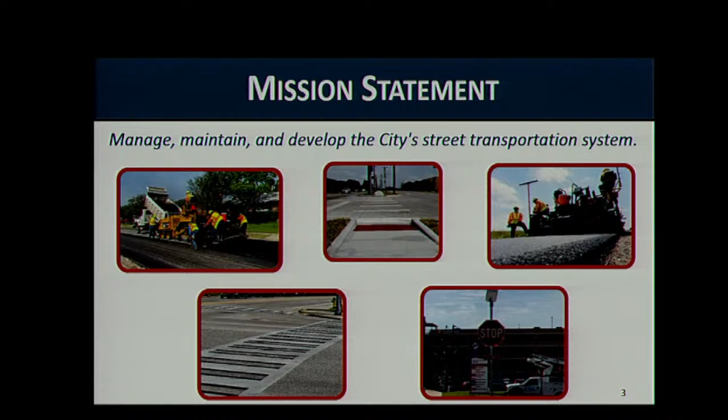So what's our mission statement in streets and traffic? We'll start with them first. It's to manage, maintain, and develop the city's street transportation system. There's a lot of different things that involve that - sidewalks, streets, street maintenance, pavement markings, just the gamut of what we do in traffic and in streets.

So what do we encompass? We have over 1,200 centerline miles of streets and roadways - that's like driving to Chicago, the amount of streets in our city. And that's quite a few roadways. 252 signalized intersections and about 50,000 signs as well.

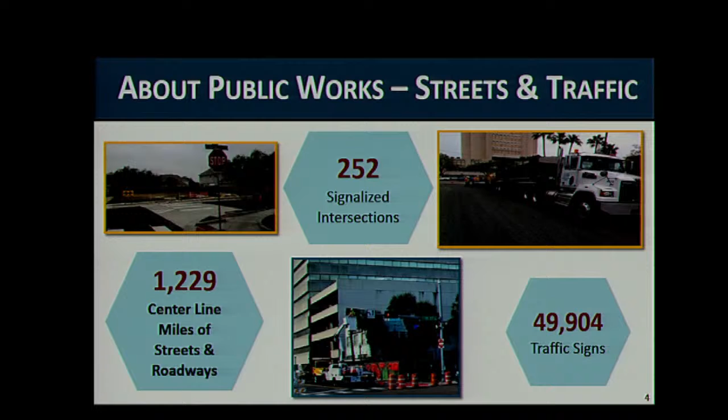And if you've been in Corpus most of your life, you'll know that every weekend we have signs that get knocked down, traffic signals that get knocked down. It's important that we continue to maintain those areas.

So let's talk about what our achievements have been in 2021. 19 months ago when I got here, the city manager gave me a lot of initiatives that we had to accomplish, and a couple of those you see here are those very ones that he gave me.

So achievement one, we established the first ever 5-year rolling infrastructure management program that's approved by you and can only be changed by you. This gives us more transparency to our citizens, and you can see that document online on a daily basis.

And when we approved budget this year, our 2026 year will go on as well. So again, transparency so our citizens will know what roads are going to be done. We fully implemented our design team, internal engineering design team, so now all of our projects for contractual services in street maintenance are designed in-house. Still a few in residential reconstructions, but we're going to start transitioning those as well.

The other major initiative was to implement in-house paving crews. And I am proud to say that Mr. Mata has been instrumental in implementing 2 fully staffed paving crews today that do in-house work. Those are the roads we would never get to, roads that don't need total reconstruction yet, but are past the point where they just need minimal maintenance. That's the area he's hitting today, doing a neighborhood approach. So, 2 major initiatives.

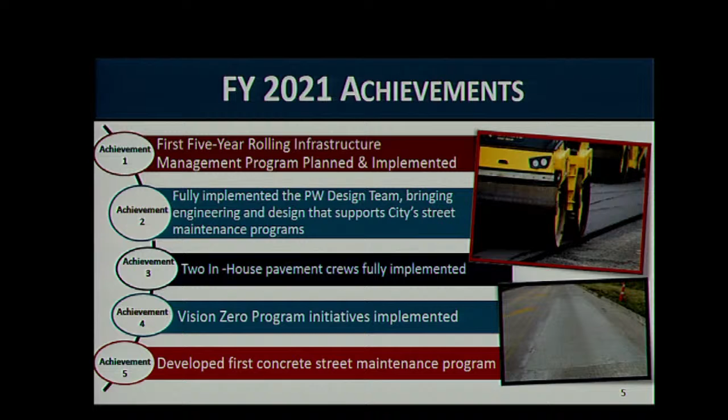And residential street reconstruction, which is one of our biggest needs here in Corpus Christi, because when you go outside your home, that's exactly what you see first, is a damaged roadway. It's the deferred maintenance over all the years that has led to the condition of our roads today. We've been spending $54.3 million, and that's an area where you'll see we're actually proposing to increase our budget.

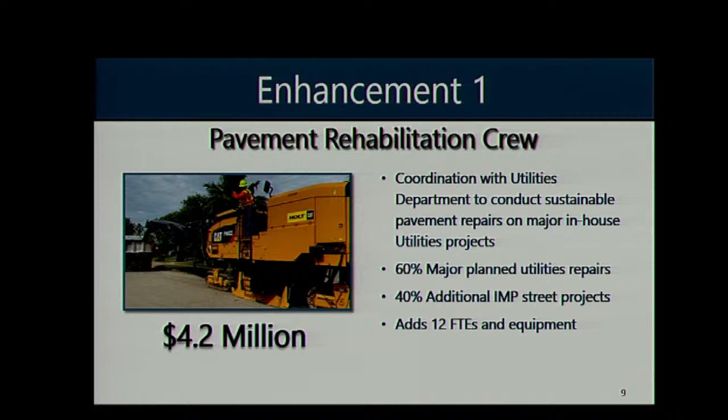This also brings in a reclaimer to be able to reclaim and stabilize those roadways. This is a major heavy crew that we'll be able to add, 3 crews that we'll be able to have in-house to do that work that currently we don't have on the program today.

Enhancement 2, Vision Zero program enhancements, is to continue that process. We had some success this year with flashing stop signs, for example. For us, that really made a difference in some areas, and we got a lot of feedback from our citizens about those. The speed trailers that we put out, you're able to calculate traffic and speed, so that you can put in traffic calming devices or signs. It's a very important process.

So this will build on that. Last year we started at $120,000. This year we'll add another $800,000 to that, so $920,000. Currently we have 4 speed trailers, and now we want to add an additional 4 to help us. And then stop signs, there will be multiple stop signs that we'll be able to buy. Last year we had a small amount that we were able to buy with that $120,000. This would significantly increase that.

One thing I didn't mention that I want to mention is street lighting. There's no funding right now if someone calls today and says, I want a new street light. We can put it in the process, but that funding has to come from somewhere. This is going to be able to put 100 street lights in, for areas that are dimly lit, which would help pedestrian safety and mobility through an area.

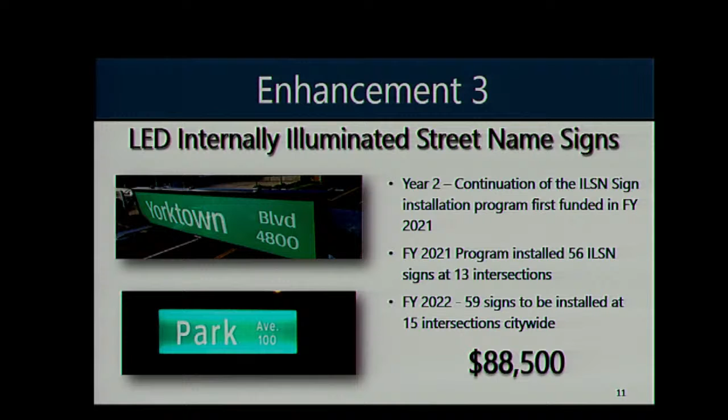This will allow us to put in 59 signs installed at 15 intersections citywide. These would be on arterials like Staples, Airline, the area of Lipes — all over the city. We want to make sure we're hitting all of our areas. This puts $88,000 toward that, continuing the process we started last year.

So Enhancement 4 is a very important program to me, and I think to a lot of you on council — it's the Safe Routes to School program. This is the start of this process. For us, pedestrian safety and mobility focused around our schools within a quarter mile is important.

These are the kind of things we can put in internally, in-house, if we had funding, along with our contractors. So when we looked at that, we evaluated all of our schools and took the top 3 with the biggest deficiencies — school zone issues, crosswalk issues, sidewalk issues, walkable paths, bike paths — and we recommend 3 school districts, 3 schools.

Tuloso Midway Primary was the highest priority in District 1. Fannin Elementary was next in District 2, and Yeager Elementary in District 3. Again, this is the start of this program. We need to start somewhere, and we want to continue that process.

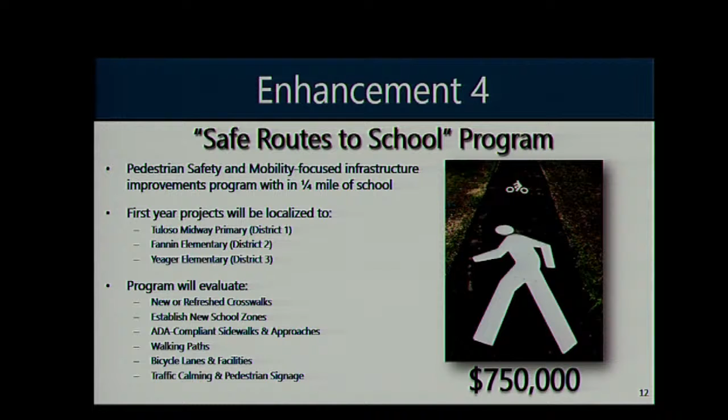When we are planning — not we, CCISD is planning a new school — why aren't these things being looked upon?

Well, yeah — and a great example would be Calallen. I don't know how old that school is now, but it's in a neighborhood with no sidewalks, and then it becomes our problem. We're sitting here going, how do we make the path, how do we get the kids to school? London's having this problem right now because there's a school in a cornfield, and now there are homes in the middle of cornfields. And now it's going to be our problem — not necessarily, I'm using that loosely — but what do we do about it?

So in the initial planning of these schools — and I realize many back then were different from what exists now — maybe there wasn't sufficient planning and vision to see what the future holds for the area.

But wouldn't this be something, part of this, that we should be looking at early on? Yeah, agreed, it is. And so we're doing a couple things to improve the codes here within the city.

The Unified Development Code, as we update that. Also, we're going to be bringing to the council a design standards manual for development so that we have the right quality of product that's put in. I know personally we were involved with the new Carroll High School, myself and Richard, and his traffic engineer.

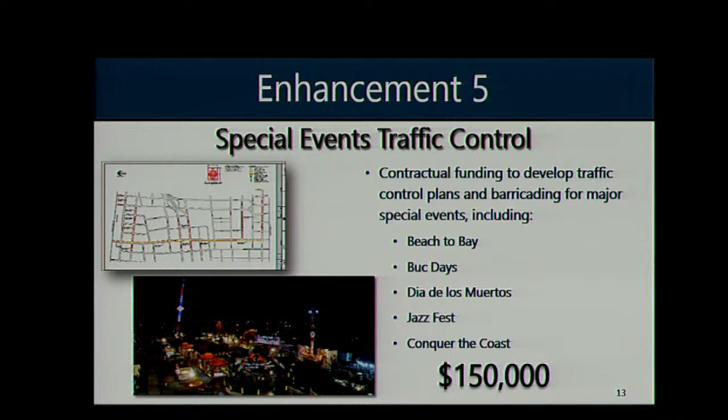Currently, when we're doing traffic control for these events, the cost comes out of our budget. So we wanted to identify that as we move forward and what that cost would be, and move it into a line item so we can see our expenditures on a yearly basis. So enhancement number 6 is a pavement evaluation contract.

This is important. We talked about this earlier, and how do we get to the next level, how do we forecast where we are. We've got a pavement management system that was started by the Corps of Engineers. It was called Micropaver, and they changed that to Paver. We are 8 iterations behind on that system, and it can no longer be upgraded. We need to get to the next level.

There are pavement management systems out there, out of the box, that can help us do that forecasting very easily. Today, we have to calculate it by hand. So one of the things we're working with IT on is to put this in place and be able to work with our pavement and our work order management system.

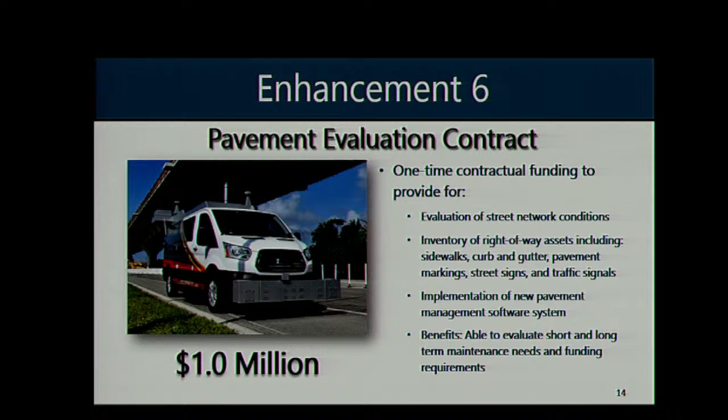This would evaluate all our streets again, so we have a contractor come and evaluate all our streets to get a new PCI network. That's important - this rain that we just had accelerated our degradation, and we need to know where we are currently today. So this will add $1 million to do that this year. That was one of the major initiatives the city manager gave me when I first got here.

Number 7 is a CDL pilot training program. This area is important because we want to make sure we can partner with places like Del Mar or other higher education areas so we can provide training for our employees to get CDLs. That's currently the biggest area we lack in bringing personnel into our service level areas. They don't have a CDL, and without one, they don't qualify for our positions. So internally, these are positions we want to promote and work on that process.

So there's a process in place: we bring in people, train them, and keep them moving up in our program. That's $14,000 - it's a pilot program. You'll see that on the stormwater side too as I move forward.

The next one would be a safety grant match. We apply to TxDOT every year for highway safety improvement programs, and we were able to get 3 projects in the next 3 years, and there has to be a match that goes along with that. So we're asking for $100,000 to do that. This will improve signals and signalized intersections for pedestrians and vehicles.

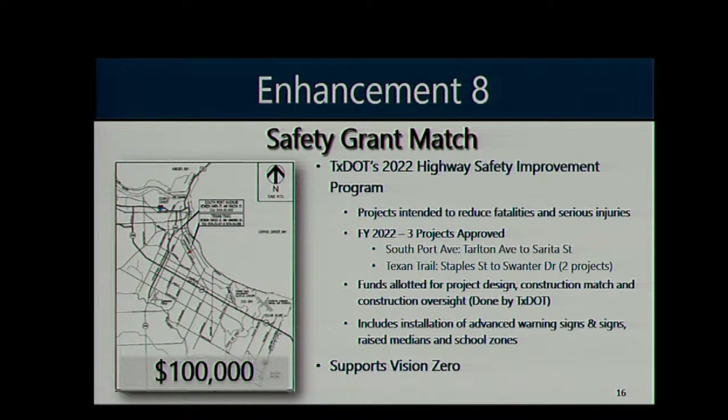Excuse me, Mr. - Yes, Mr. Martinez, Councilman Martinez. Yes, Mr. Martinez, on the CDL program, I just wanted to talk about things that we talked about with the police academy and the fire academy.

You know, I want to be able to avoid having people getting their CDLs and then going off and doing something else. So in that program, I just asked that we consider, like in the police academy and fire academy, some kind of commitment to the city once they get their CDL under this program. Yes, sir, there'll be a 2-year commitment for that, same as we have for engineers when we're attracting them in. They have a 2-year commitment, or they have to repay it prorated on the time they're here.

Enhancement number 9, traffic signal battery backup system installation program. We'll be able to add 63 battery backup systems at our intersections, providing 4 to 6 hours of signalized operation. For example, during the freeze event we lost power, and the intersections that didn't have a battery backup lost signals, while the ones that did lasted 6 hours, giving us time to put up a temporary stop sign, improving safety. We lose power based on AEP outages, vehicle accidents, and similar events. This would keep our system on battery backup when that happens, which is very important for our program.

That's $600,000. Enhancement 10, fiber optic communication to traffic management center.

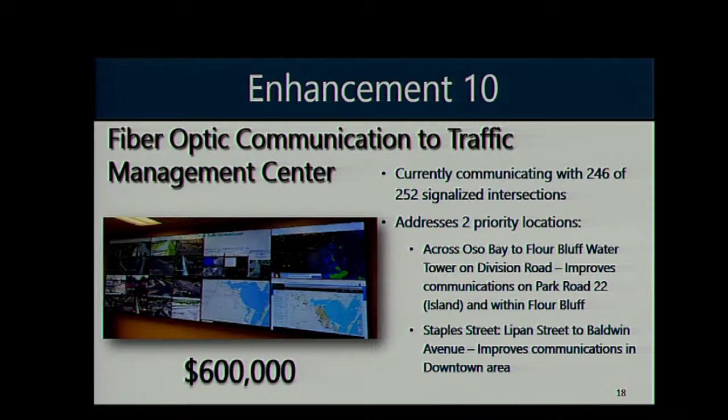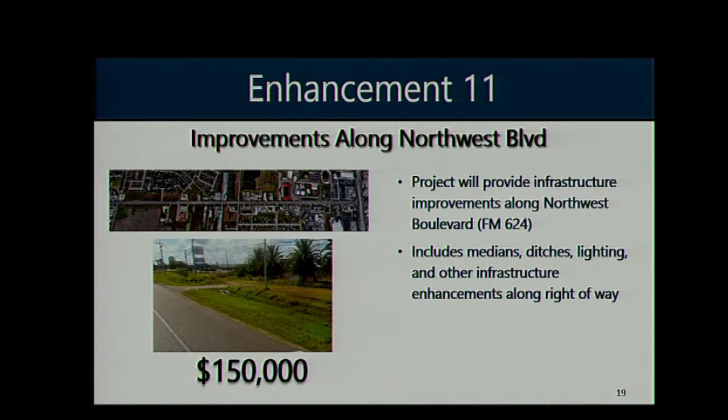Enhancement number 11, improvements along Northwest Boulevard. We're looking at how to improve medians, ditches, lighting, and other infrastructure enhancements along that right-of-way. That's a big area that's booming, and drainage is important there, so we've set aside $150,000 to start doing some work in that area.

We're going to move into stormwater. Again, you see the organization—in this area I'll concentrate basically on street operations and stormwater operations, that's in Roland's area for stormwater and in Gabriel's area for stormwater engineering. Our mission statement: protect life and property through proper stormwater conveyance while protecting water quality in our creeks, rivers, bays, and estuaries. Very important process.

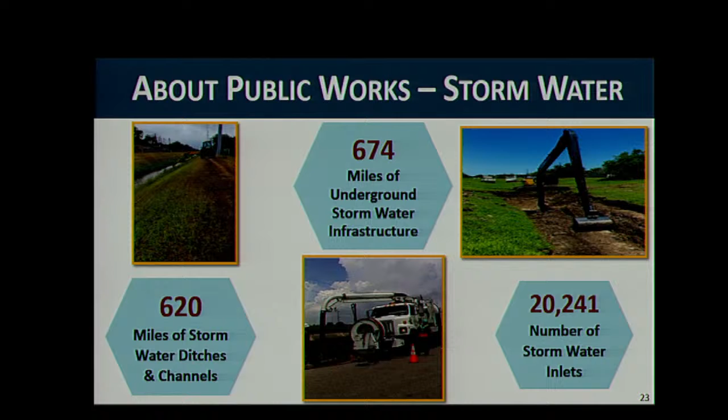We've got a good starting point, but this is an area we can definitely improve as we move forward. So about Public Works, what do we do? Last year, 19 months ago, it was consolidated—there were areas in the Water Utilities Department and areas in Parks, now they're in Public Works. We've got 620 miles of stormwater ditches and channels, and it's very important we maintain those properly so we can convey water through those areas without backups in the designed channels. We also have 674 miles of underground stormwater infrastructure that we need to inspect to see where we'll have issues or need improvements—you don't see them every day, you drive over the top of them. And then 20,000 inlets throughout the city that we have to keep clean, because those eventually get to our rivers and bays.

So what were our achievements? I'll go over a couple right now for the sake of time. One of the biggest things we did was develop a robust citywide street sweeping program, and we want to continue building on that. Currently it's a contract, and we've got 2 sweepers of our own that we've been using to augment that contract and do special events and that type of thing. So you'll see in one of the proposals we're looking at implementing more in-house street sweeping.

Richard, the street sweeping—we had none, right? None. And this gives us what exactly? This will give us another 2 sweepers. So we have 2 today, because we bought some last year.

Okay, and this will give us another 2. And now we'll be able to do arterials on our own, doubling the arterials from going from 4 times a year to 8 times a year.

I'll give you an example. Everhart was just built. We went out there, contractor cleaned it, said okay, here, you bought it. We bought it, so they sold it to us. We went forward, and within a week we had debris back out again. So that tells us that materials are coming off the properties when it rains. You've got to keep that clean and keep it from getting into the inlets.

Over the last 2 months we've been sending our sweepers out there on a daily basis, but you can go out again to Everhart and still see debris along the curb line that we're generating. So a lot of debris, many years of not sweeping, and that's exactly what's built up. We need to continue to sweep to start getting that off and keep it from getting into our inlets, because it'll eventually cause siltation in the channels, that's exactly where it's coming from.

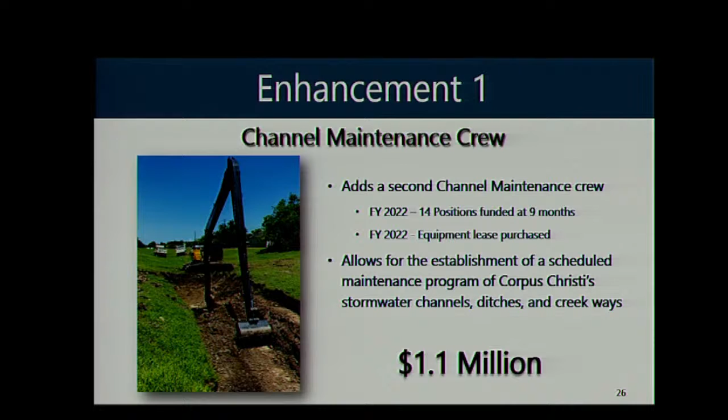We have a contractor here, Coastal Sweeping. They're trying to do their best to keep up, but they're seeing what we're seeing. When they're going through, they're filling their sweepers up immediately as they're running through the system, and they're having to continue to move back and forth and dump because there's a lot of material on our roadways.

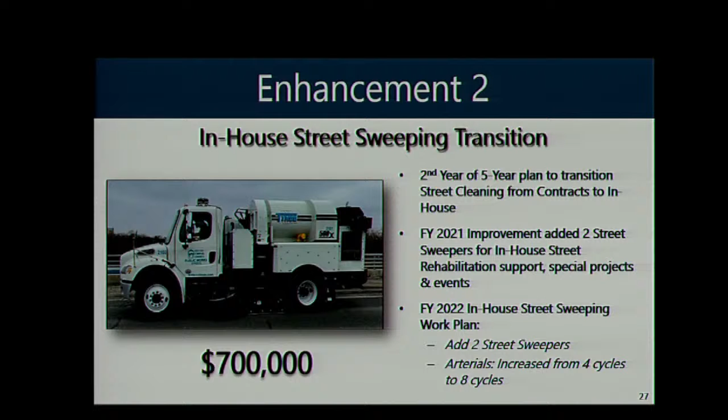Enhancement number 3, again, the CDO pilot program. We're just making sure that we're adding this in the stormwater side as well as we did for streets, $14,000.

Enhancement number 4 is public education and outreach. This is an important area, especially since we're proposing a standalone stormwater utility fee. We need public education to let our citizens know the reasons why we're doing this and what some of the important aspects are. This will allow us to get radio, cable time, billboards, and print education materials out for this. So, a very important part of the stormwater program.

Enhancement 5 is a stormwater account reconciliation team. We need staff members to assist with that. If we have a standalone utility fee, we need staff to help reconcile for customers and give them information on what they were paying before versus what they're paying today. There's also going to be a utility assistance program that this group would help with. This adds one full-time manager position and converts one vacancy we currently have that we'll be able to utilize in that area. The team ensures financial support and creates a sustainable program. This gives us an opportunity, as we propose this to you, and with any possible approval, we'd be able to implement it.

We have a question, Councilman Pusley.

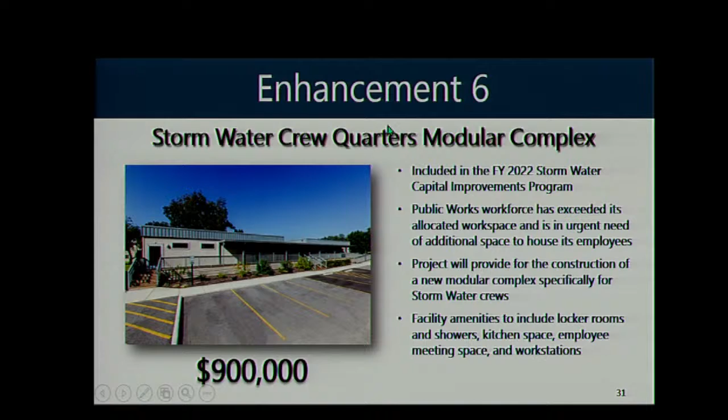So we're going to start talking about the proposed stormwater utility fee, a standalone stormwater utility fee. So why are we here?

There are a couple of options we have to do that. But to be able to do that, we need to have a fee, or a revenue source that we can rely on yearly and move forward with.

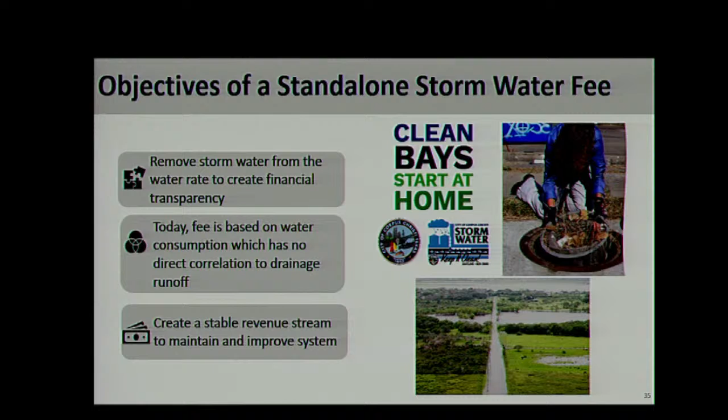This will also create a stable revenue stream to maintain and improve our system. This allows us to come back to you every year and say, here are the improvements we want to make, here's the fee structure, can we move this forward on a yearly basis?

So let's talk about the current fee structure. But with that, I want to talk about current customer impacts. So currently today, since we're funded through basically water usage, I want to tell you about water connections and types.

Out of the water connections, 91% of them are residential water connections in the city, and 9% are commercial. So the majority of the connections are residential and will impact residential currently today. But the estimated impervious cover, if you look at the center circle of the pie chart, 2/3 are non-residential.

So the more runoff is coming from non-residential, commercial, than from our residential customers. But how do we pay for it? On the right side, currently today, it's almost half, just a little less than half residentials are picking up the amount of funding we currently get, versus our non-residential or commercial. And then 3% from large volume users are also contributing.

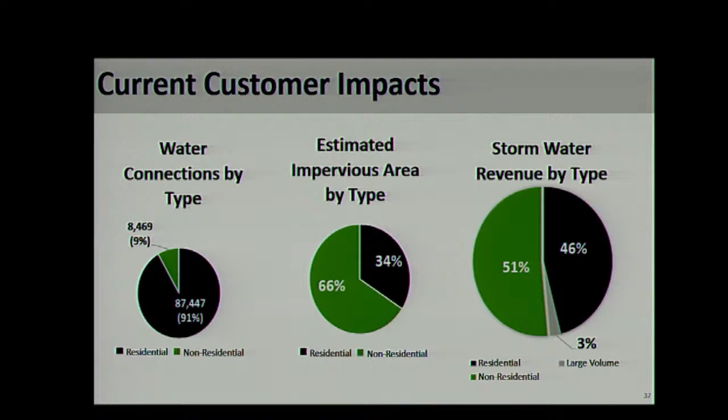I'm going to be the first one to tell you today, it's just me and my wife in the house we live in. And 8 months out of the year, I use less than 2,000 gallons a month, so I pay no stormwater. I pay nothing, I don't contribute into the stormwater fund. So out of residential customers, 18% pay zero towards the stormwater program currently today.

And 30% of non-residential customers pay zero towards the stormwater program. I know that's going to be impactful in those areas, but there are some things we're looking at to try to reduce that impact over this first year. But that's an area generating stormwater runoff, and that's an area we need to look at.

So the next one is parcels without water meters. This is an area we need to look at as well. There are some examples—parcels that might be a place where they store cars, vehicles, or have a shop. You see they have roof lines or created pavement structures that are actually having runoff, but they have no water meter today.

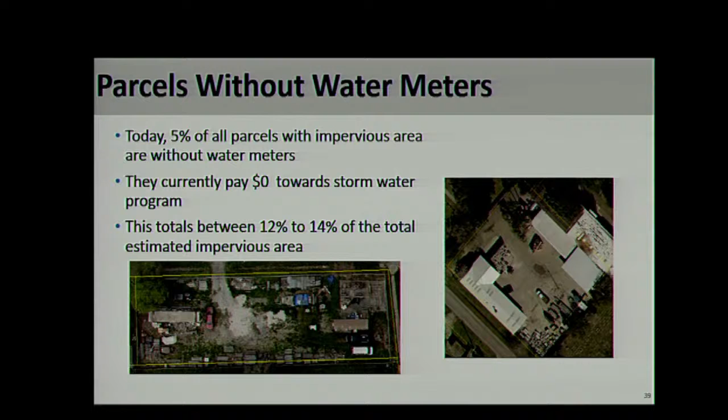So 5% of all the parcels in Corpus Christi with impervious cover are without water meters, so today they contribute zero towards stormwater at all. That totals between 12 and 14% of the total impervious cover in our city, which is a lot. And if you look at that, it could generate about $2 million in funding in that area, so we're looking at that as well.

So our proposed rate structure. How do we start here? How did we get to a point where we're able to calculate that?

So we looked at a residential unit. What is an equivalent residential unit? A house, a property. What is the median in Corpus Christi? We looked at industry standards to take a random sample, and so we took a random sample of 400 properties to come up with that calculation. That calculation is 3,280 square feet.

So that's what we're saying, a Tier 2 property would run—and I'll talk about tiers in a minute, Tier 1, 2, and 3—would have an average of about 3,280 square feet of impervious cover, which includes driveways, roof lines, sidewalks, those type of things that will not run into the yards. That number is important because it's the basis of what we're looking at when charging tiers and when charging for non-residential customers as well.

And we'll talk about the tiers in a second, but again, we put them in 3 different tiers: Tier 1, Tier 2, Tier 3. Tier 1 would be 0.75 of that. Tier 2 is that area, and Tier 3 would be something like a larger estate home or large properties.

So when we go to non-residential, it gets a little more complex. You have to look at what they're actually running off and how that is equivalent to a residential unit—we have to equate it back to something. So we look at an intensity of development factor. I'll give an example—one that came up over the last couple of weeks, and that was agriculture.

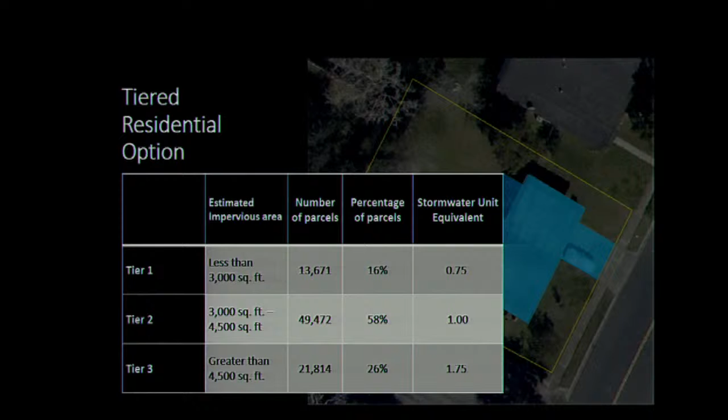Currently today, we're charging our customers based on their water usage. For us, we're looking at how to make sure it's a fair process across the board for what you're discharging into the system.

So our base program is $15.74 million, and the improvements we feel we need to start with, to take us to the next level, is about $2 million. So that brings us to 17.75.

That would generate our $17.75 million and the fee that works with that. So 23, 24, 25, and 26 - in a minute I'll talk about the improvements that go along with 22 and why it's at that level. 23 through 26 would add additional improvements as we go along through the program, adding an additional work group to do more maintenance on channels - going from 2, we're asking for the second one this year, to go to a third in future years. And then adding additional components, which we'll look at.

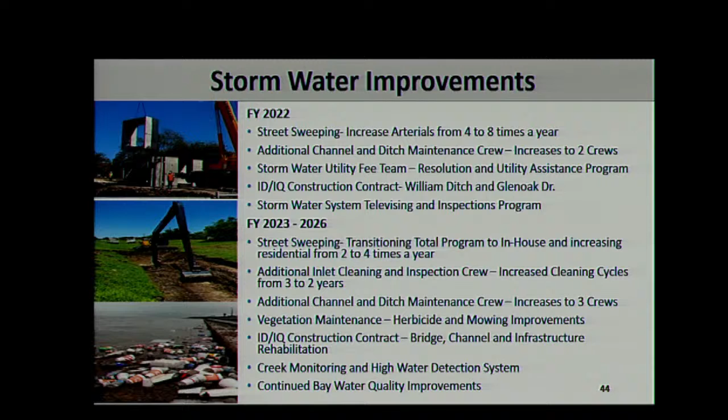And then continue our bay water quality improvements - how do we put in more netting, more catch basins so that we don't get all of the, I'll just say, convenience store cups that go out into the street, restaurant cups, those type of things, because you saw that picture showed up there. There were a lot of cups, styrofoam cups and things like that, and trash. Those are called floatables. We need to get those floatables out of our system, and that's where we need to improve.

So, customer impacts - I'm going to try to get through these quickly. Here are 2 homes: one at 5,500 square feet, and the other at 15,000 square feet. One would be in Tier 1, and one would be in Tier 3. So if you look at today based on gallons of water used, I want to illustrate how that affects how they pay for water. So they use 10,000 gallons - they'd be paying $28.50 towards stormwater today.

The 15,000 square foot home, maybe it's just like me and my wife living there, and they use under 2,000 gallons. So they pay 0 right now towards stormwater. But they're in Tier 1 and Tier 3. So Tier 1 would go down to $4.59, which you're never going to hear from those residents - they'll just be like, okay, I got a reduction. But we'll definitely hear from Property B because they're used to not seeing an increase, and now it's $10.71 because they're in Tier 3.

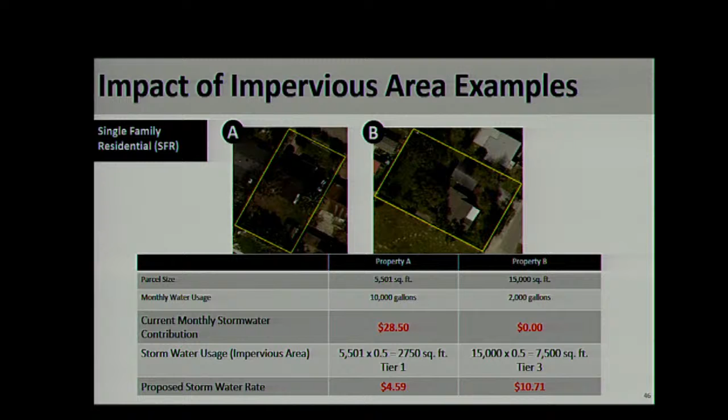Again, this is the residential pendulum we're talking about, which you talked about earlier on the commercial side. This residential pendulum goes based on what the water usage was, not on the amount of discharge coming off their property - water usage. So it goes from one extreme to the other based on the water usage. But we think this is fair - it's fair based on what you're discharging off into that area.

And we'll talk about this utility assistance program that will help in some of these cases. So here's an example - we're proposing this, and we heard from a lot of constituents about being on a fixed income, or over 65, or disabled. So we looked at it and said, all right, what are the criteria? We looked at age over 65, low income, and also disability.

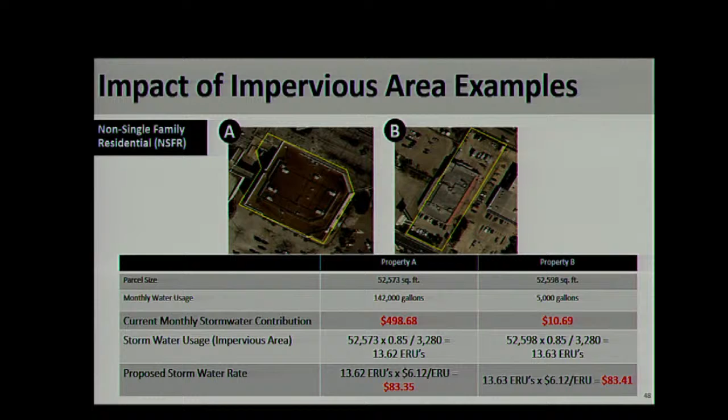No, definitely. That's what I was telling you earlier. Property A will not call you. All they think is something went wrong in my bill, and I'm not going to say a word to you. Yes, property B is going to say, why did my bill go up to $70? Well, we want to do that education piece to let everyone know why that is. Again, it's swinging the pendulum and based on what's fair for stormwater usage today.

Yes, as Peter said, this also gives us some time to get out there to the public because we're not saying to implement immediately. We're not proposing for you to approve immediately. What we're saying is after October it wouldn't go into effect till January. It gives us a few months to get out there, talk to the individuals, let everybody know about it, give them that assistance, be able to put those programs together to say, here we are, this is the reason why we need to do this.

Right, the recommendation is to consider approval as part of the budget, but the effective date won't be till January. That gives us time to educate the community, correct. Yes, sir. And again, this is our proposal.

So again, looking at benchmarking cities, we went back through to take a look and say, okay, are we off base? Are we putting this formulation together totally different than any other cities have done before? Are we basically in line with what other Texas cities have done? We listed the Texas cities here that are the 7 largest cities above us. So the basis of their fee, if you look in the first column, is impervious cover for most of them. You go to Houston, it's impervious area and drainage facilities.

So they look at what drainage facility is behind a home or behind a business. Is there a bayou back there, is there a channel, is there not a channel? And they do that calculation that way. In Fort Worth, they do livable space, so still impervious cover, but livable space. In Arlington, it's an equivalent residential unit. They came back and said, this is the unit and this is what you're going to pay by an equivalent residential unit. And Corpus Christi, we're water consumption, how much potable water we use. As you see, none of the other cities are based that way.

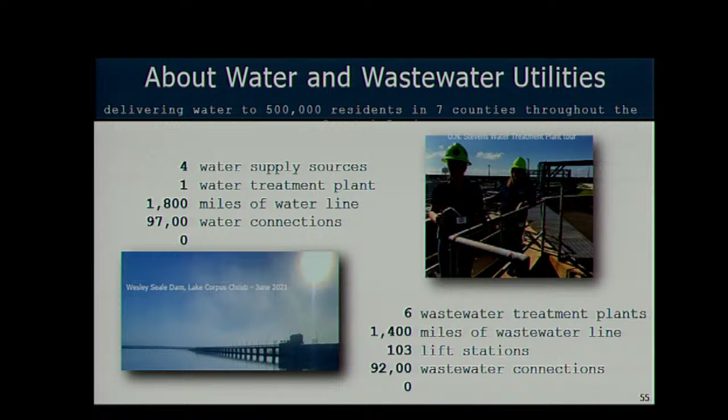We have 6 wastewater treatment plants, 1,400 miles of wastewater line, 103 lift stations, and 92,000 connections there. We are managed by a dedicated group of leaders, and the org chart you see before you today is our leadership organization chart that covers all areas of water utilities.

Our achievements for the past year included our efforts towards getting the city closer to a desalination decision. We've had several town hall meetings, and we were approved for the SWIFT loan with completion of our environmental discharge study. Those are all major accomplishments which took a lot of work to get us there.

During February of 2021, everyone remembers the extreme weather event, and Corpus was one of the first major metro-sized cities to lift the boil water notice, which was a huge accomplishment.

$48 million in the American Rescue Plan Act will be allocated citywide for water line replacements and wastewater lift stations. We've got plans to do all of that. We've already started that process on our lift stations this year, ordering several thousand feet of pipe and adding new equipment to that process.

We are in the process of expediting the elevated storage tanks that are standing empty, and we've got a plan in place to move that project forward. These are all big projects, and I think the achievement is that we're getting those elevated storage tanks online during the 22 fiscal year.

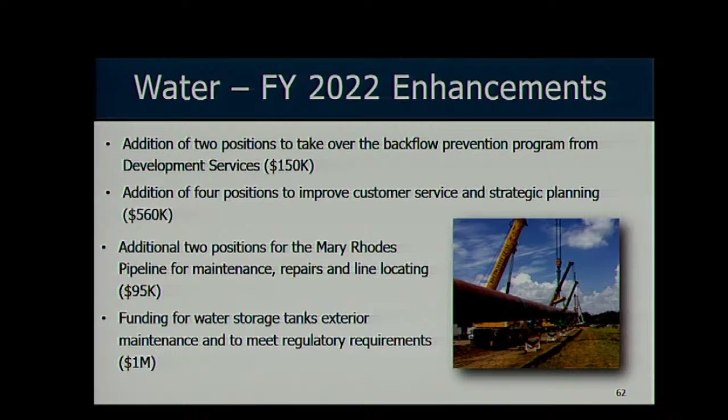Hi everyone, Gabriel Almeida, Assistant Director of Water Quality and Treatment. So yeah, the Mary Rhodes pipeline, a 101-mile pipeline—currently we have 2 maintenance technicians that manage that pipeline as far as all the maintenance and preventative maintenance that goes on there. This is going to get us 2 more positions to assist with that. The pipeline's 23 years old, and there's more maintenance that's needing to be done with it. They'll be able to assist us along the 101 miles of the pipeline, which also includes 2 pump stations, and maintaining those facilities.

Thank you, Gabe. And in the capital budget, you'll see where over the next 4 or 5 years we're going to be adding substantial investment into the Mary Rhodes pipeline. So it's critical that we maintain and manage that, one of our most valuable utilities for water service.

Yes, go Michael. A few weeks ago we discussed the Mary Rhodes pipeline and the issues with not being able to run at full capacity. Correct. Y'all brought back a number of $9.6 million to adjust that. That's correct. Are we including any of that 9.6 in this 2022 budget to start that process? Yep, so that's over this year, next year, and then also the next 3 years that we're going to be investing in that. And it's in your capital budget.

And Gabe, you want to come and just describe that briefly on the capital budget, and then if you want to turn to those pages, you can turn to them. Okay.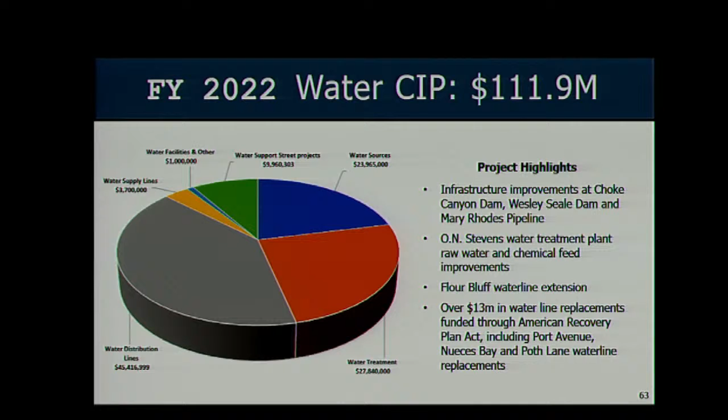As I said earlier, we're working very hard with our engineering department right now. The city manager and I just signed the emergency declaration so we can order the equipment and material to get those towers back online. They do have a long lead delivery time, so what we're trying to do, while we're procuring a contractor, is have the city go ahead and order that equipment through our emergency declaration. Hopefully we'll cut out several months of delivery schedule on that.

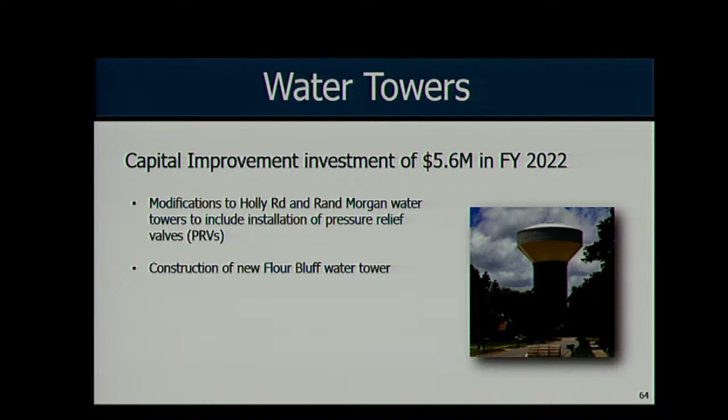Next slide. So for other funds in the water department, the Texas Water Development Board has approved $11.4 million towards environmental surveys, permitting, conceptual design, power transmission, and contingency.

Our 2022 plan is using the drought surcharge, continuing to acquire funds through the drought surcharge through the Port of Corpus Christi. The drought surcharge is an exemption fee, a non-mandatory, non-refundable fee of 25 cents per 1,000 gallons of water per month, paid by large volume industrial customers, to be exempt from the applicable allocation of surcharges for water shortage conditions.

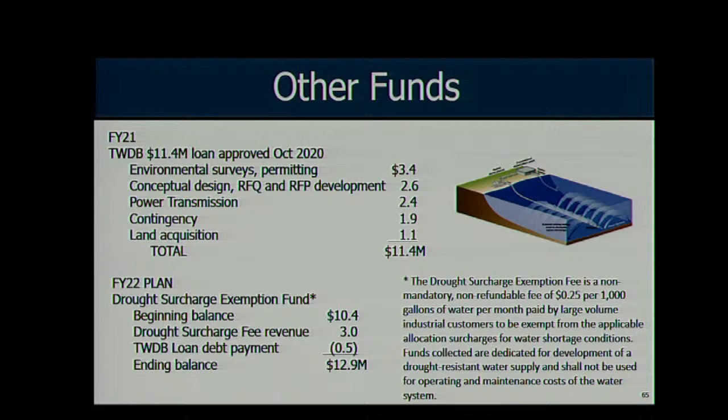Mr. Murphy, we have a question. Councilman Smith? Yes sir, thank you Mr. Murphy. So we've got a couple of different numbers. I know this is a source of funds, but in our CIP in the budget we have $15.8 million on desal and $6.8 million. A couple of issues I'm a little bit concerned about.

We originally, I know you're new, but we did $2.75 million to get our permits. And the question was asked at the time that we did that, does that get us our permits? And the answer was yes, if it doesn't go to contested case. So that's money, I think, that has been spent.

We got another $3.4 million in permitting. And again, I'm looking at $15.8 million on desal, and it looks like another $6.8 million unspent. So is that $21 million that we're... I don't think. Amber's got her numbers over there, but we anticipated this question might come up, so she's going to walk you through that right quick.

Okay, Councilmember Smith, what I can't answer for you is the 2.7 - that was previous to me. But what I can answer for you is what I show now for fiscal years and how that allocation works. Let me make sure I get it right for you.

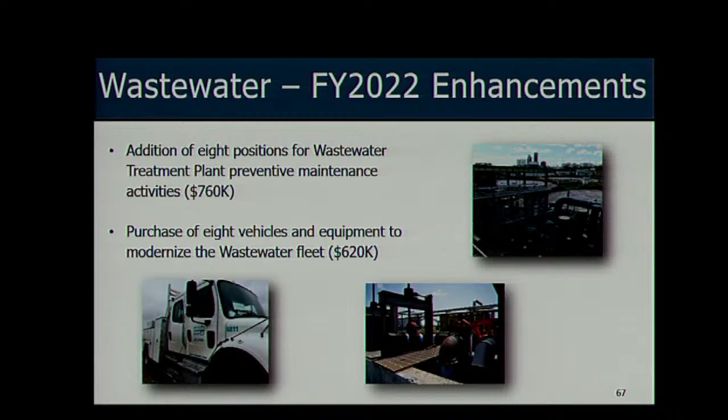Mayor, if I could ask a question here. I appreciate adding the individuals, but I want to know exactly how you're programming this. I know we're looking at asset lifecycle management, and I appreciate the use of the term, but are you doing this preventive maintenance programming manually, or are these work orders being generated automatically through the Maximo system?

They're going to be generated through the Maximo program. Well, you can generate them manually through Maximo, but they should populate automatically. So I wanted to understand, have you populated the Maximo system to where it can be done automatically? Anticipating that question, Daniel, you want to come up?

This is Daniel Dang. Everybody knows Daniel. He is our Assistant Director over wastewater treatment. Just describe what our plan is, Daniel.

Good morning, everyone. Daniel Dang, Assistant Director of Wastewater Treatment. As Michael mentioned, on the wastewater side—actually not only wastewater, all the utility side—we have been using Maximo to automatically create the work order for PM, preventative maintenance. PM is part of asset management for utilities, which is a proactive process to evaluate the current asset based on the inventory, the existing conditions, and life cycle cost analysis.

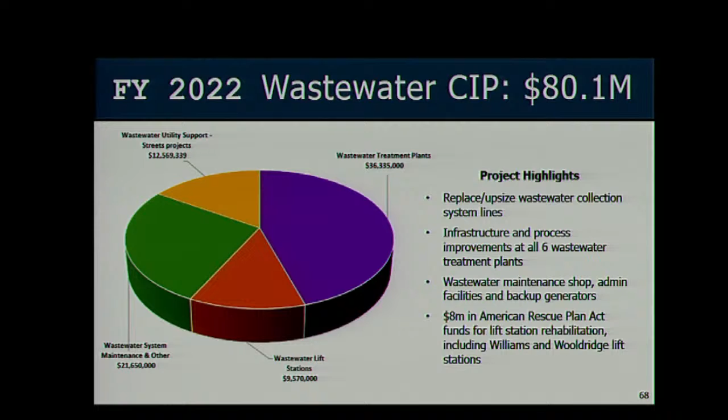Did I skip one? Oh, I'm sorry, the slide hadn't changed yet.

Okay, so what I was talking about with this particular slide was our six wastewater treatment plants plus the SCADA program, which will provide us an extra layer of security and also reaction time in case something does go wrong with one of our facilities. And then also backup generators, we're going to put those in.

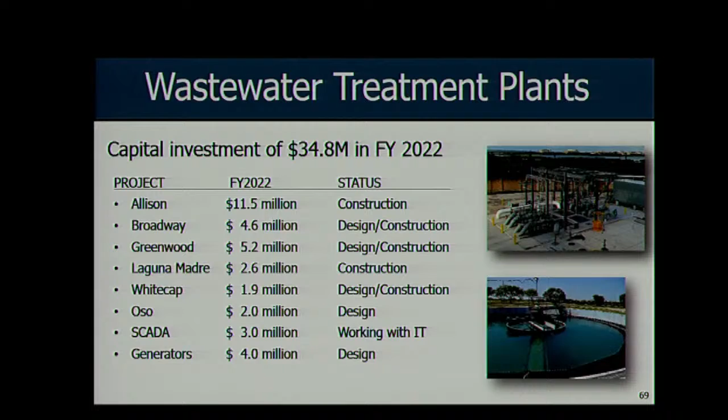Obviously, one of the things in wastewater that consumes us every day that we show up to work is a consent decree, addressing that and eventually getting out from underneath the consent decree. Just a little brief background on that: in 2021, EPA signed a settlement agreement. As part of that agreement, over 90 miles of sewer lines were cleaned, rehabilitated 2 major lift stations, and 4 of 6 positions filled for program compliance and monitoring. The other 2 positions are currently in the queue right now, trying to hire those positions.

Vector truck delivery, like everything nowadays, is very late. Getting heavy equipment delivered in what I would call a reasonable amount of time is almost impossible nowadays. We've also got a 4-person crew that is standing by, waiting for the truck to be delivered, so we're holding off on hiring those positions until they actually have a piece of equipment.

So we're going to hire the 4 electricians, 2 mechanics, and 2 technicians - those are the 8 positions we were talking about. Clean and inspect 90 miles of sewer lines again, we're going to do that. And then major rehabilitations of 4 lift stations that Kevin was just talking about at Williams, Wooldridge, Morgan, and McBride.

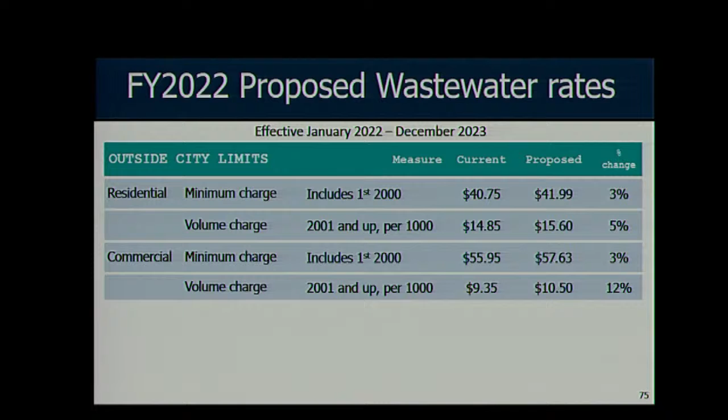We don't need to hand it off. Okay, good, thank you.

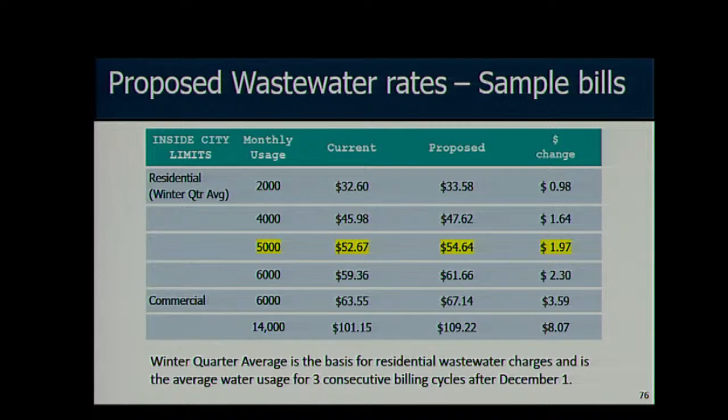Thank you, Reba. That concludes our presentation. So questions, we're ready to answer. Otherwise, thank you very much.

Well, since the Mayor's not here, who's the pro tem? Is that Martinez? I think it's Hunter, but I'll take it. It's Michael? All right, well. Yes, sir. I think it'll be a little difficult, so I'll hand it to John. Councilman Pusley?

You know, there was a lot of discussion this morning about the fact that we mix stormwater with water usage, and the two don't correlate. I've also, since I can remember, had that same argument about water - you determine what my wastewater bill is going to be based on how much water I use, and that includes my swimming pool and my sprinkler system, which have absolutely nothing to do with water going down the sewer pipe. So my question is,

you allowed us at the county to install a separate water meter for irrigation systems in our parks. Can residential customers do that as well?